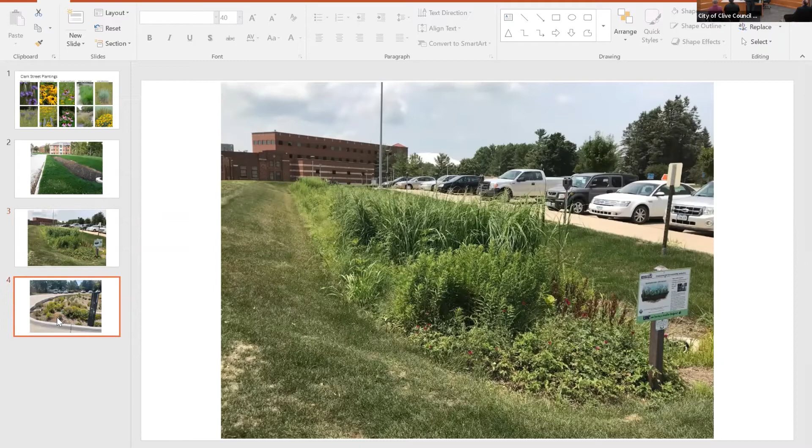Dry conditions do create some challenges for these cells, but these plants are designed to survive not only the very wet, but also the dry.

So I went out this afternoon and took this picture. Councilwoman Judkins has mentioned this cell before—it's designed a little bit differently. You don't have the turf that comes all the way down to it. This is a parking lot edge where water flows directly into the cell, though you can see the turf over here.

I pulled this to show that a cell that hasn't had as much time to grow out will still let you see the mulch underneath it, even with the dense planting we're doing.

And you'll still at times be able to see some of the infrastructure in the cell—here you can see the bonnet and the standpipe. So if the water ever gets that high, it has a way to start going directly back down into the storm sewer, as opposed to infiltrating into the soil.

And then you can see the inlet structure on this cell in particular. We have a different type of inlet structure on our cells on Clark Street, but you can still see it not only at the street level, but also another part that goes down to the bottom of the cell.

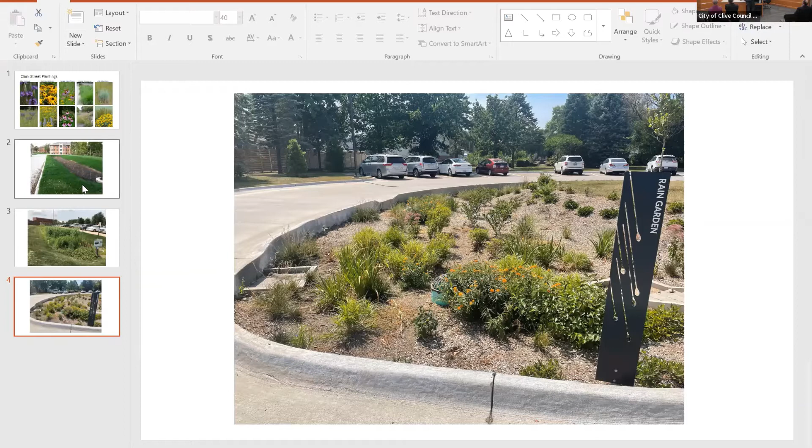Quick question: when you go back up to that first one and talk about some of the cells we have, it seems like many of our cells' slopes are different than these, right?

Yep, we do have some cells with a steeper slope, and none of them are just one long continuous stretch like this. There's one that might be close, but the big difference is they have walls in between them because of the elevation changes we have coming down—there's one on Clark Street that doesn't.

I just drove through it today. There was the one that's by Paul's house, a long skinny one like that as well.

So in the areas where we have slopes that are too steep, we're going to need to make some choices. This work needs to be done before any plantings go in, as our public works and park teams are going to be going out with the vac truck. They're going to suck out the existing mulch that's in it now and add more amended soil to the bottom of those cells, raising the bottom and creating that new level we'll be planting in. I think that's going to help with some of the elevation challenges, but not all of them.

We wanted to see what they look like fully constructed, but we fully understand as we've gone through this process, navigating from what was designed to what was built to now what we actually have to manage, that we're going to continue needing to tailor and work on those. There could be additional infrastructure we need to put in place, whether it's a small wall in certain places, so that we create something that can actually be managed long-term.

Well, I'm happy you said all that, right? Because at some of those points when you drive it, I think, wow, there's no way I could mow that today, let alone on a good day, health-wise, right?

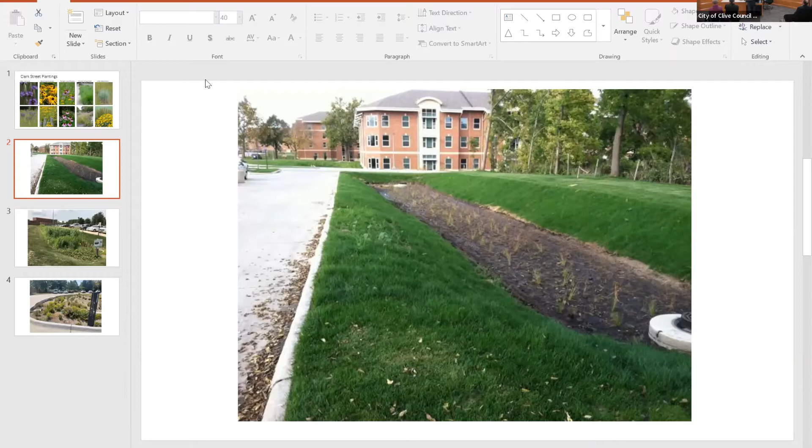Susan: as much of a leader as Clive has been in flood mitigation efforts, we haven't led on this, and there are many examples to direct people to look at throughout the metro. One thing I'm really happy about is that the city has looked to the experience of a community like Coralville, which led in this effort and has multiple bioretention cells. What they learned is to use plants that people recognize—the plants he was showing us are in lots of gardens. That's helpful, so people know that's not a weed, that's something very desirable. I really think the city has done a great job with that.

And the advice is to just ask people to give it a little bit of time for the plants to grow. Within a few years, we'll be as thrilled with this as other communities are with their efforts. So, really good questions. Thanks, Susan. Any other comments, questions?

Again, we have had a motion and a second to close the public hearing. Any further discussion? If not, would the council please vote on closing the public hearing? And would the clerk please post that vote?

The public hearing is closed by a vote of 5-0.

I'll move a resolution approving plans and specs. Second. Motion is seconded to approve plans and specs. Further discussion? Seeing none, would the council please vote? And will the clerk please post that vote? That passes by a vote of 5-0.

Move to receive the bids. Second. Motion to receive the bids. Further discussion? Seeing none, would the council please vote? And would the clerk please post that vote? Bids are received by a vote of 5-0.

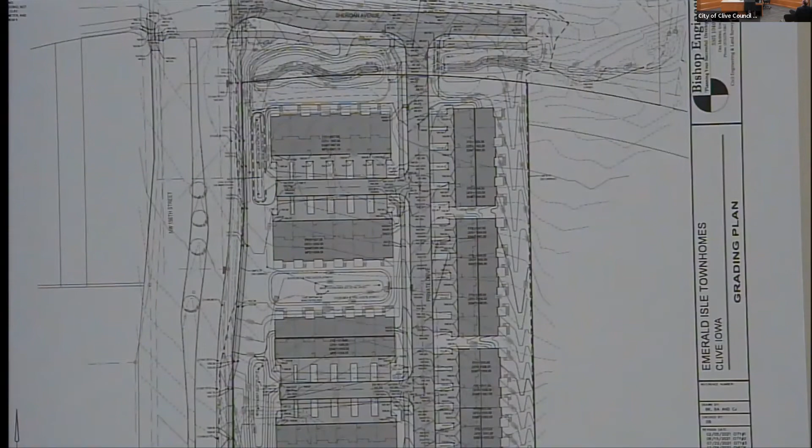What you're seeing before you tonight is consistent with the master concept development plan presented through the rezoning process. We've just finished working through the site grading and stormwater challenges we were still dealing with at that time. The property is just over 4 acres and will be developed with 41 townhome units. You can also see the extension of Sheridan to the north, which acts more as a shared commercial driveway frontage road than a true public street, as it will transition in this area to continue with the gravel drive that serves the existing cell tower and the Des Moines Waterworks facility.

It is possible with future development to the east that road could be extended and improved, but that wouldn't necessarily be a requirement for future development, depending on the access and routing for those specific properties.

The Emerald Isle Drive improvements, consistent with the zoning change and development agreement we worked through, will be completed by the city at a future time. That was the financial assistance council had agreed to in order to get this project to be a reality, along with some of the other site restrictions and considerations.

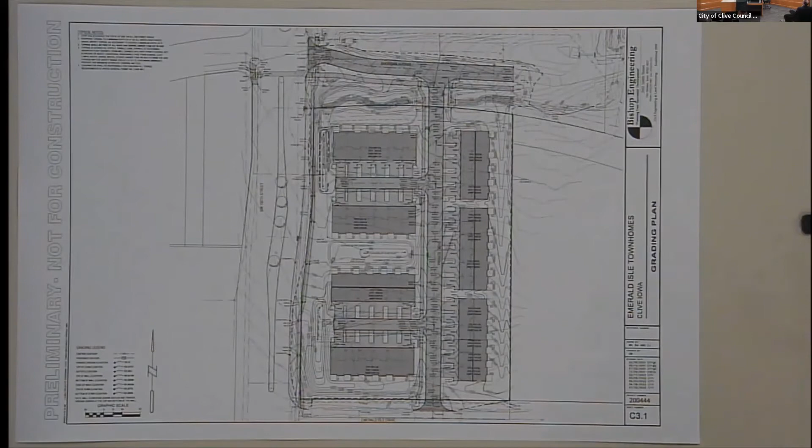Stormwater, as we talked about quite a bit through the rezoning process, is going to be handled in a few different ways. We have some bioretention located on the site, and they'll be handling their detention as well. We also talked about this north drainage way, which will provide a small portion of the detention requirement and the water quality volume requirement. And then off-site...

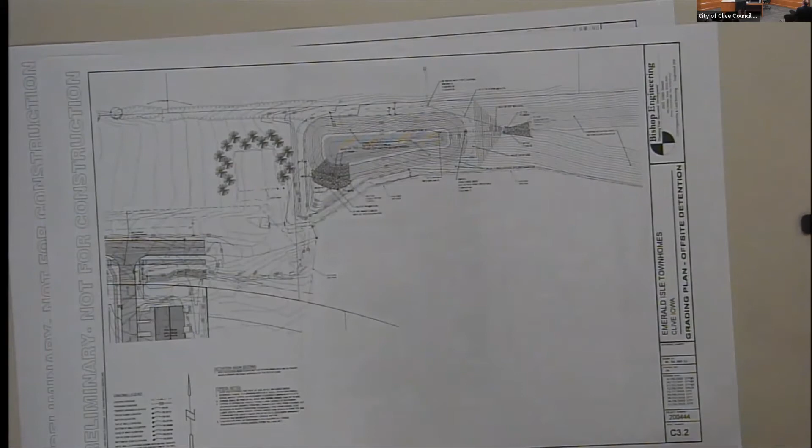Here's the corner of the site. Just up here behind the cell tower is an existing regional dry basin. That is going to be improved, off to the west of the existing basin, with a new wet detention basin that will provide the stormwater management needs for detention for this property, as well as picking up some additional capacity that could serve other future development in the area.

The development will be doing that improvement along with the project at the same time. Yes, that is going to be completed by the developer.

Don't know if we can kind of zoom in. Oh no, I have the big sheet, sorry.

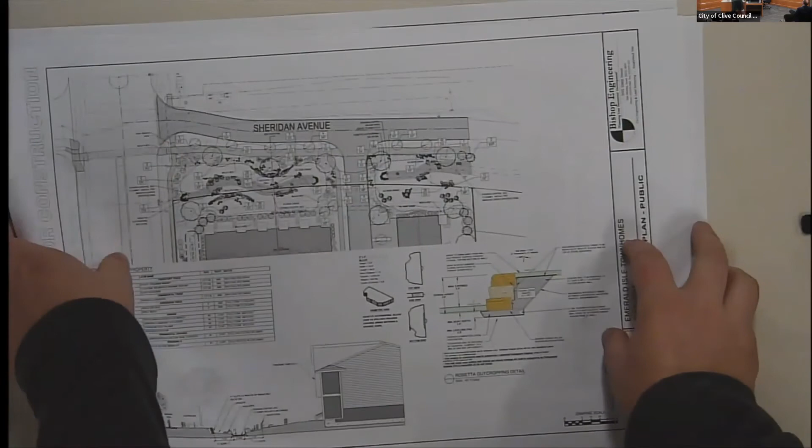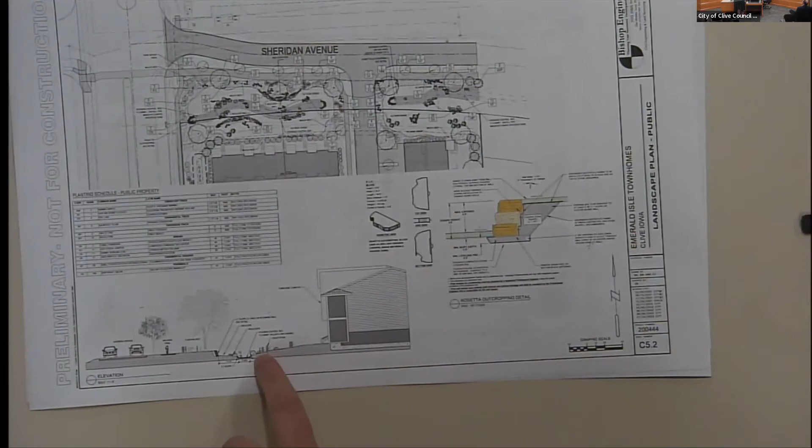For this north drainage way area, I know there was a lot of conversation about that in consideration with the design. You can see they are keeping that natural meander for the creek flow area. Here is a side profile showing more of what to expect with the townhome unit put in here. There are some grasses and ornamental plantings, as well as a block wall that is going to be this Rosetta outcropping style.

Weaver stone. I like that. Good.

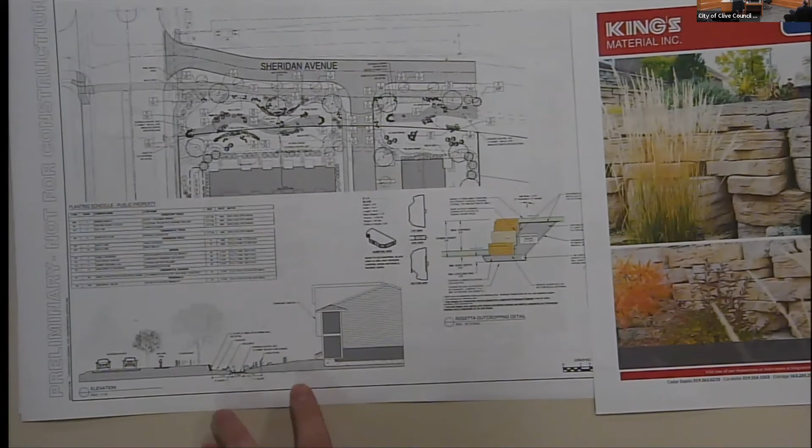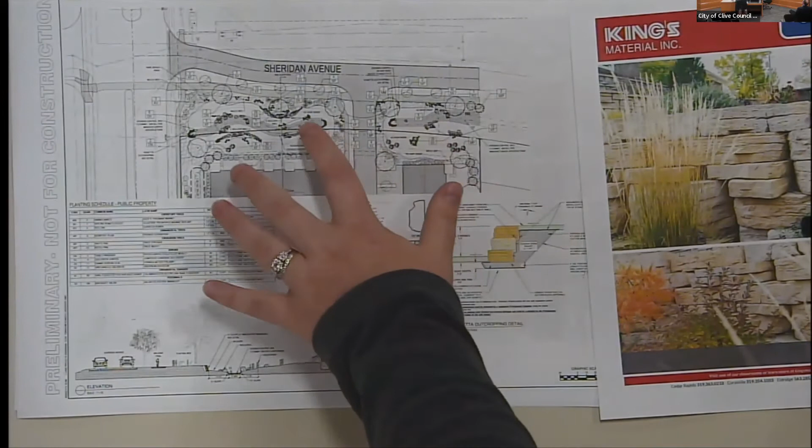There is space to allow for some tree plantings along that 8-foot sidewalk recreation trail extension. With fitting the road in with the existing water infrastructure and maintaining that creek channel, we weren't able to get the kind of curvilinear trail we typically see, but we think this is a good solution and will be an aesthetic enhancement.

There are also some spots called out here for park benches. And then there's the opportunity in the future for the city to continue extension of the trail being put in here, ultimately northeast to the Stonegate Park just a little northeast of here. That would be the long-term plan with future development or city projects in the area to get that connection to the park.

Has there been any discussion about like a playground, especially with Richard presenting on some of those more natural looking playgrounds? Has there been any discussion with the developer about that, or any plans?

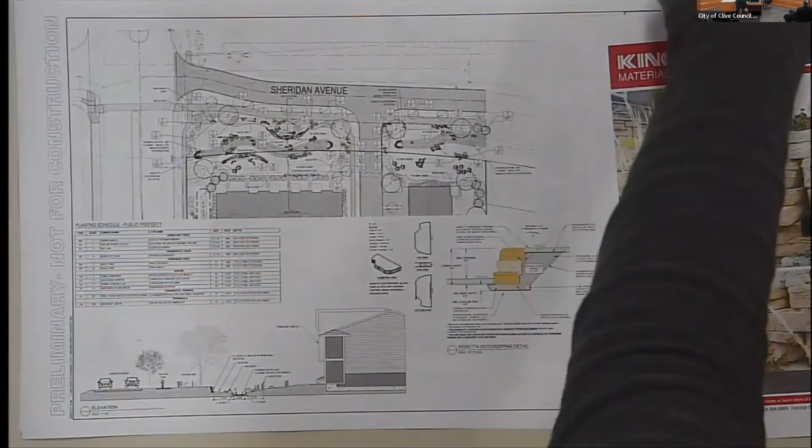Stonegate Park, as I was saying, is actually just right over here, so it's fairly close to this development. That is a traditional park with a playground that'll be fairly accessible once that full trail connection is made. To get there today, you would have to walk up to the corner and then across the street. It's a bit of a walk, but something people could do, and the pedestrian infrastructure will be in place to allow someone to take the sidewalk north and then east to get to the park.

Do we have a timeline on that future trail connection? We don't have a specific timeline for that. That is city property, and that is the routing of the future trail, so we could certainly prioritize it through your strategic planning and budgeting processes if you wanted to see it come online quickly. In the interim, we do have the existing sidewalk, and of course the sidewalk on this site will be installed with this project, so they would be able to get over to the park that way.

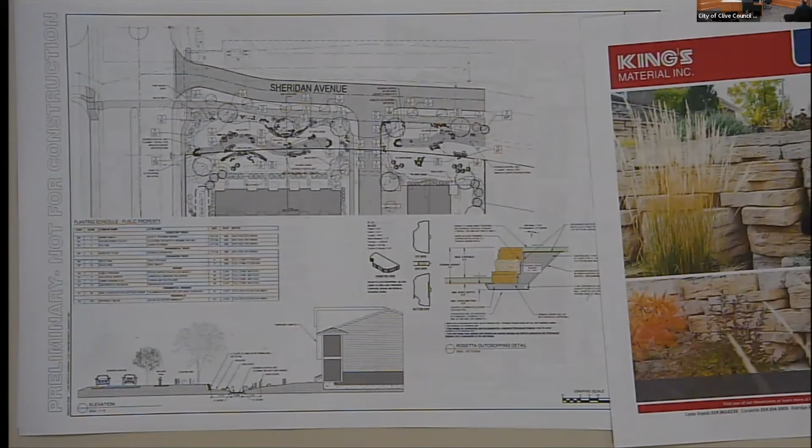Further questions or comments? Otherwise we just need to approve the site. Move approval. A motion and a second to approve the site plan and preliminary plat. Further discussion? Seeing none, would the council please vote? And would the clerk please post that vote?

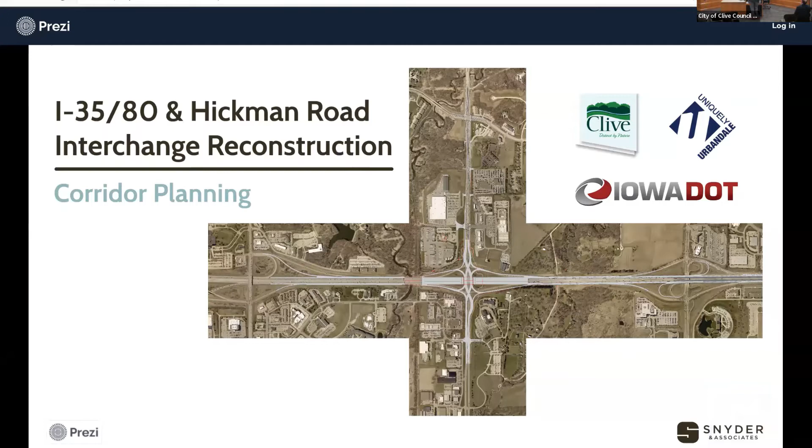We'll get the presentation set up here for Nate from Snyder and Associates to give the council an update. This is part of their charge in the scope of services on this corridor management planning effort taking place over the last year between the cities of Clive, Urbandale, and the Iowa DOT to plan for this massive transportation project that'll be coming at us in the next 3 to 4 years, completely reconstructing the Hickman interchange at the interstate.

And then what are some opportunities the cities want to look at in terms of pedestrian enhancements, aesthetic enhancements, connectivity, stormwater management, which as we've talked about earlier tonight is very important to our community, and ways that we can really make this stand apart.

And then on the end of that, starting to look at what are some funding opportunities, both at the federal and state level, and between the two cities, to make that happen. This is going to be our 50-year shot to do this right.

The council had prioritized in previous strategic planning efforts to get ahead of this, making sure staff's engaged early on, and this is the fruits of that effort. I will say this presentation isn't the end point by any means - there are still next steps to talk about between the two cities regarding chasing grant dollars and what that looks like.

The design will be incorporated with what the DOT is doing. They have a public information meeting they just set the date for, the Tuesday before Thanksgiving, where they'll be unveiling this whole project to the communities and the public at large.

Nate will get a little into that tonight, but this is really one checkpoint of many to come for a substantial project that basically takes through 2028.

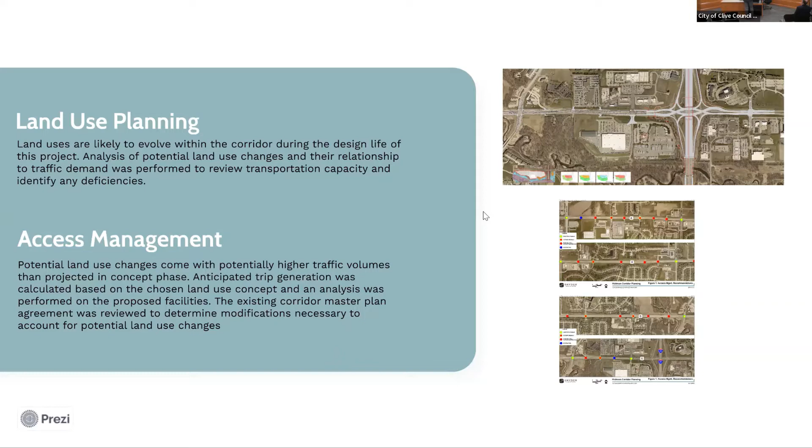I want to talk first about land use planning. Throughout the design life of this project, there is a likelihood that there could be some land use changes, and identification of those early on will help inform the design. We wanted to take a look at the corridor in general.

Early on in our discussions, it was clear that the majority of the corridor is not likely to have a wholesale change in land use, with the northeast quadrant taken up largely by Living History Farms and new commercial development in that corner. The northwest and southeast quadrants are pretty much fully built out as commercial. However, the southwest quadrant...

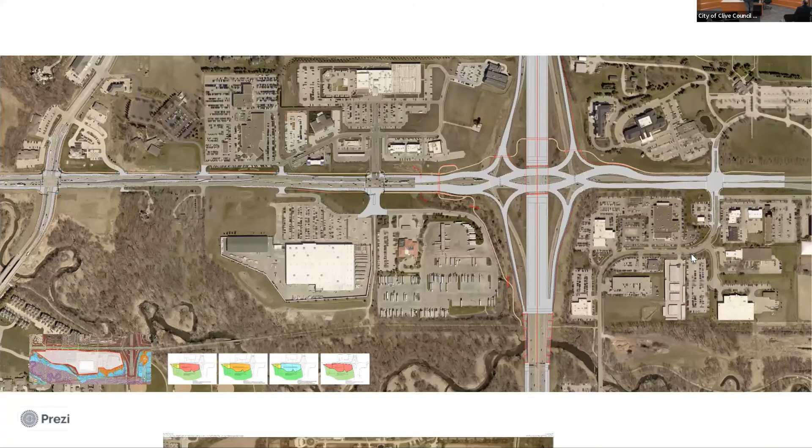South of Hickman from 128th to the interstate was identified as an area of focus for its potential for redevelopment. Taking into account the floodplain and floodway of Walnut Creek, as well as required setbacks, that area represents 56 acres of developable area.

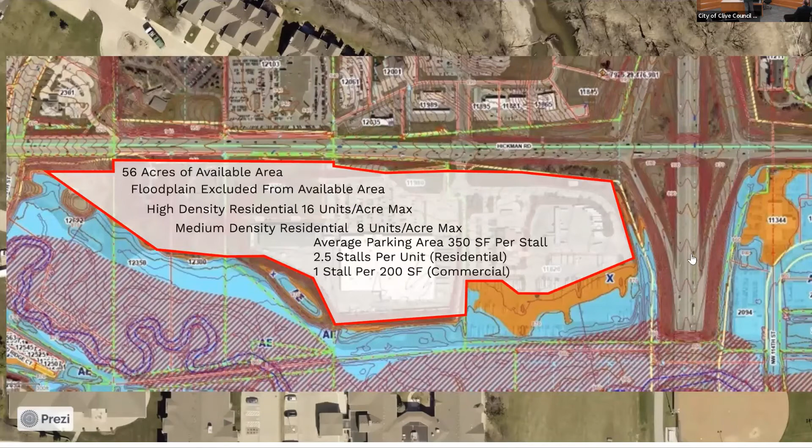The team put together a number of scenarios for redevelopment, including residential and commercial, or a mix of the two.

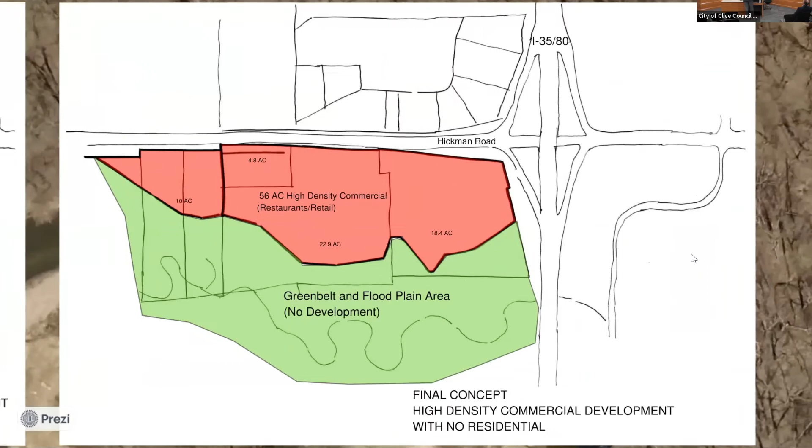Ultimately landing on the entire area being redeveloped as high density commercial. This represents the highest and best use of the land, as well as the worst case scenario for future traffic generation. What we do at the interchange now, we don't want to hinder future development in the area.

To give you an idea of that traffic, the current site, including the Loves and Menards area, generates about 6,000 cars per day. If it were to fully redevelop into high density commercial, we're projecting that to be over 27,000 vehicles per day.

Can I ask a quick question? Have Loves and/or Menards given us an indication that they're looking to move, and that's why we're thinking we can redevelop this, or have I just not heard that before? No, they haven't given us an indication at this point.

We wanted to make sure that if there's a kind of a 50-year decision being made on road infrastructure, the access management and traffic management can withstand the potential for future development. You already have significant retail with Menards. If anything were to change with Loves or the vacant properties to the west, we wanted to make sure that from an access management and traffic generation standpoint, we're not creating a new issue if 20 years down the road there's a significant redevelopment opportunity. So we're really looking at a 40 to 50 year window here, and we wanted to make sure we're accounting for that.

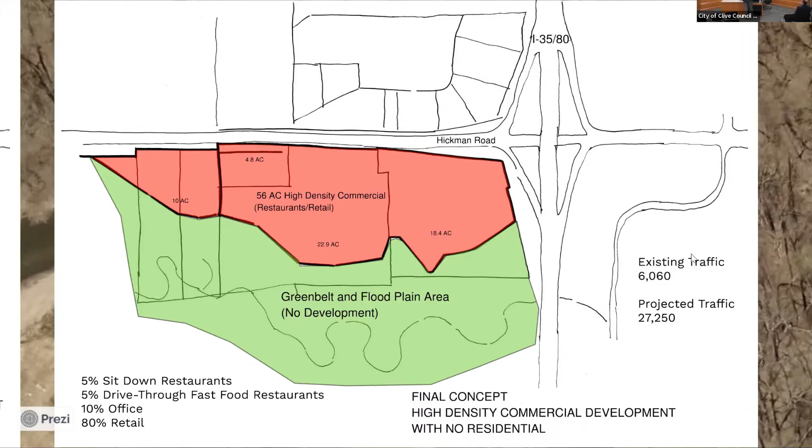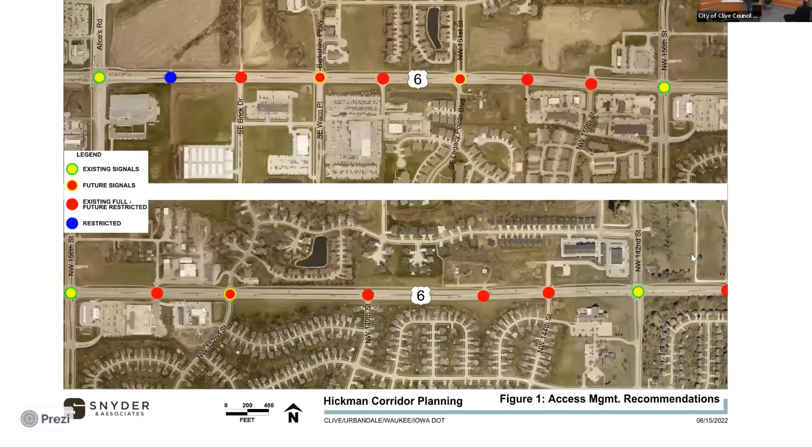DOT, City of Clive and Urbandale do have an access management agreement in place that goes from the interstate west to Alice's Road. We used the potential redevelopment and those traffic projections to look at that agreement and make some recommendations.

Focusing on our area here that we just talked about, the current restricted access at, I guess that's the Walnut Creek United Methodist Church here. In the future, if this area were to redevelop, that would need to be converted to a full signalized intersection and able to handle the traffic.

So these exhibits have been developed for the cities and the DOT to update and renegotiate that access management plan, and that would be a next step coming out of this. Don't need to get into the details, but from Clive's perspective, we want that opportunity for a future signal fully memorialized in the agreement, because we're going to be the ones that need it for development, not necessarily the Urbandale side.

And we've communicated that to them. They've of course communicated to us, as I've indicated to council, a future desire of a traffic signal at Country Club Boulevard and Hickman Road. So hence the word negotiation as part of some of these considerations.

But this next step isn't necessarily on Snyder's plate. This is between the cities and the DOT, to look at these changes, understand what the performance expectations are, and at what point it triggers these things to happen that we need to update that agreement.

That'll be a next step that, again, you'll hear a lot from me tonight on this particular item, but we want to make sure we're outlining some of these next steps as you all head into strategic planning next week, because there will be action items for you all to consider coming out of what you'll see here tonight.

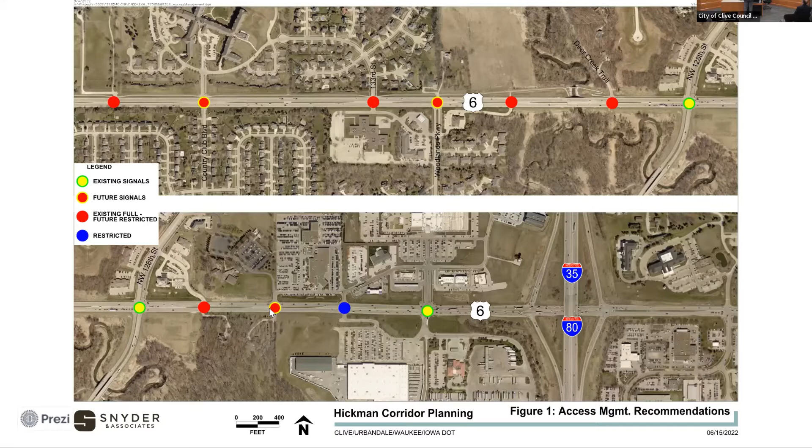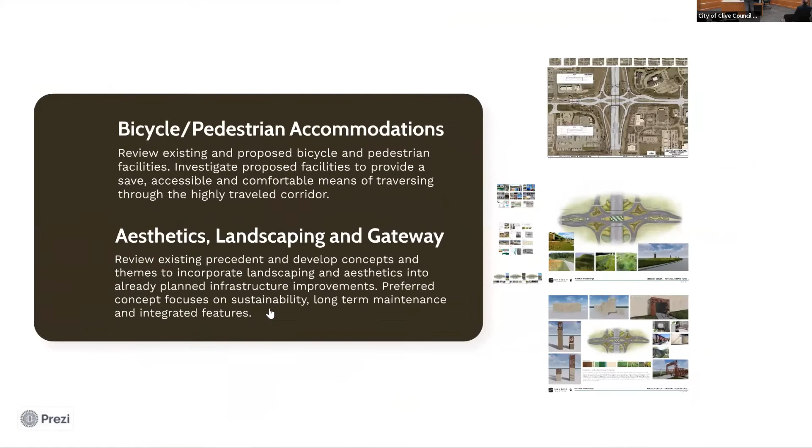If nothing else on the land use or access management, I'd like to move on to the second topic tonight, which is the bicycle and pedestrian facilities, as well as aesthetics, landscaping, and gateway features, since they kind of go hand in hand. Currently in the corridor there are no pedestrian accommodations on Hickman Road in our project area, so reconstruction of the interstate at the interchange presents an opportunity to build those facilities.

A typical pedestrian accommodation would include an at-grade facility, and that's what's shown here. We use this as our base option, including at-grade facilities. Typically in a DDI, as you traverse the interchange, you'll cross over to the center, where there's a protected area in the middle, and then cross traffic again to get back out to the exterior.

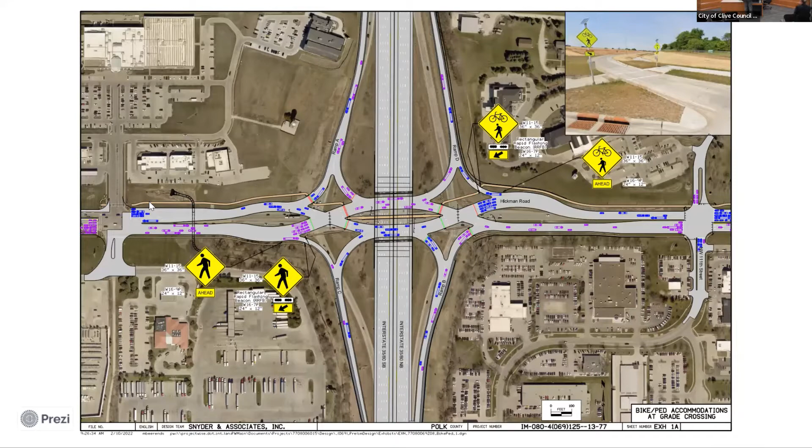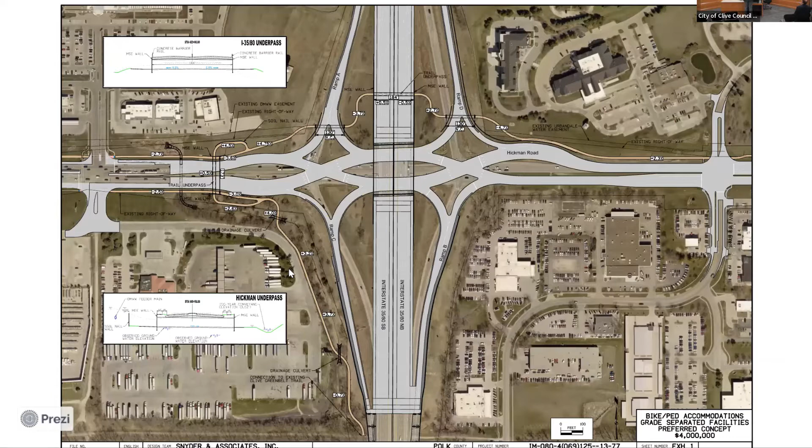I'd ask Tim to come up and present some of the aesthetics, landscaping, and gateway features associated with the pedestrian improvements as well as the interchange.

Good evening, I'm Tim West, a landscape architect at Snyder and Associates. We've been working on an aesthetic package for making the interchange area a little bit more accommodating visually, and I'd like to walk through some of those improvement concepts with you today.

Hickman represents a pretty large transportation gateway into two communities, Clive and Urbandale, and that sometimes poses problems for designing a theme that relates to both communities as we establish the look and feel of this entrance into either community.

This is the final version of the master plan, or concept plan. I'd like to step through a few of the initial processes in our design and also focus in on a couple of the main improvements for the aesthetic concept.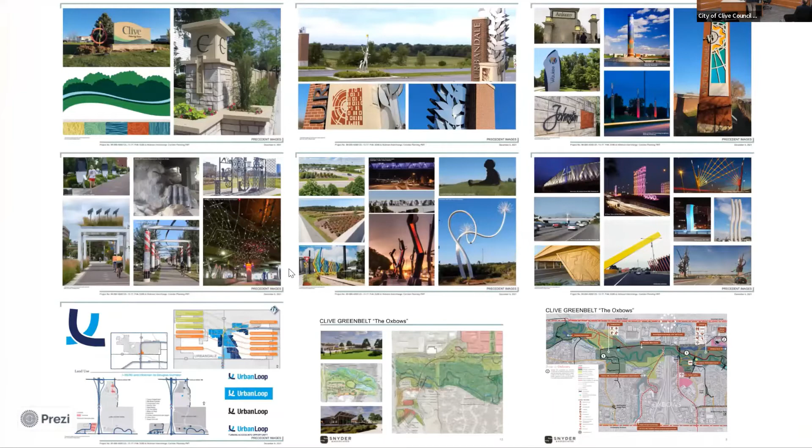These boards represent some of the early work we did establishing information we could use to pull together different themes relating to both communities. The top row shows some of the materials, colors, and textures that Clive or Urbandale may incorporate in their already existing gateway features, as well as looking at what other communities are doing, presenting these options to the design committee for further review.

The middle row, we started to look at inspirational and precedent photos showing what other communities are doing for whimsical or public art type enhancements that could go with this interchange, as well as reviewing your existing planning documents to make sure we were accounting for anything currently underway, whether promotional, growth, or recreational enhancements through this area, or something that might be interesting for us to play a theme off of.

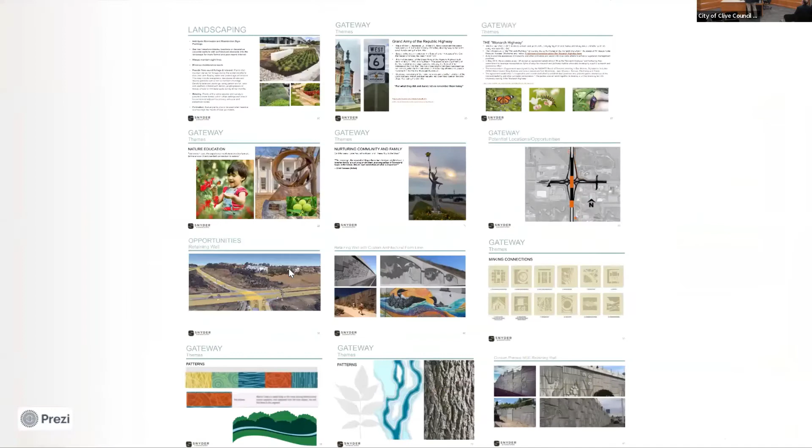We also took a look at some mini themes, if you will. What would it look like if we captured a historically important aspect of the corridor, such as the Grand Army of the Republic Highway there on Highway 6, that middle one on the top? We looked at whether there would be some interesting aspects to any type of natural processes or promotion of the Monarch Highway, things like that. We also took a look at landforms on the bottom couple of rows. What is this new interchange going to offer for opportunities where we can show off some enhancements or some aesthetics?

We're going to have some new retaining walls and some grade separation areas that we can use for promoting some of those colors, textures, and materials. What are the landform patterns that we'd like to incorporate?

A recurring theme started to come out of the Walnut Creek corridor, which passes just south of here and parallel to Hickman Road. You can see there's some initial themes that are more creek or flowing from a natural development standpoint.

We developed three concepts and started to take a look at different aspects with these. The one on the left is more of a natural pathway theme, where we really focused on the at-grade pedestrian route that went through the center of the interchange, and started to focus on the way the pedestrian would interact through that area. So you can see there's some trails and things associated with going through this center median. Those don't take advantage in this concept of any types of flyovers or larger bridges or higher bridges that would go over different parts of the interchange.

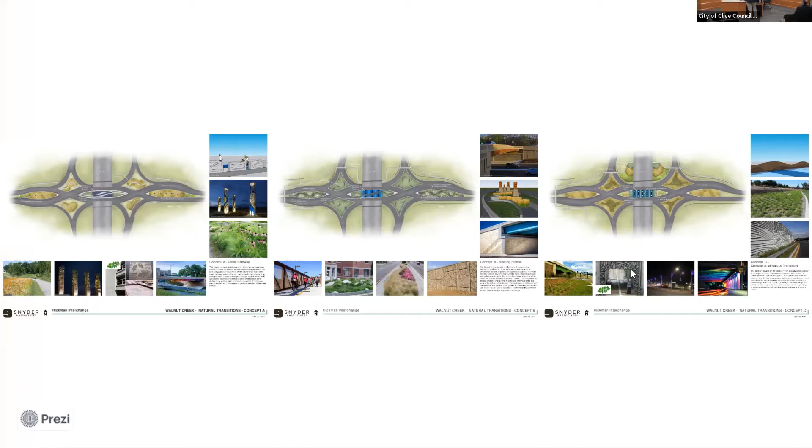We also started to incorporate some different types of entrances into these different overpass or underpass situations where pedestrians would have an opportunity to maybe focus on some texture and color changes where we normally don't do that for the motorist as they come through. We focus more on larger types of enhancements because they're not able to pay attention or get close enough to those to really make that detail worthwhile.

So we kind of settled in on the main master plan here for our preliminary design. You can see that it was really a momentum into the natural transitions, looking at native plantings, native landforms. What does it feel like to go down into the Walnut Creek corridor?

So we had some waving type of action in the colored concrete that goes underneath the overpass, but really celebrating kind of the lightness into this darker underpass and then back into the light. A lot of the focus was on more native plantings and larger landforms such as berming, and then some more monolithic, taller types of decorative columns.

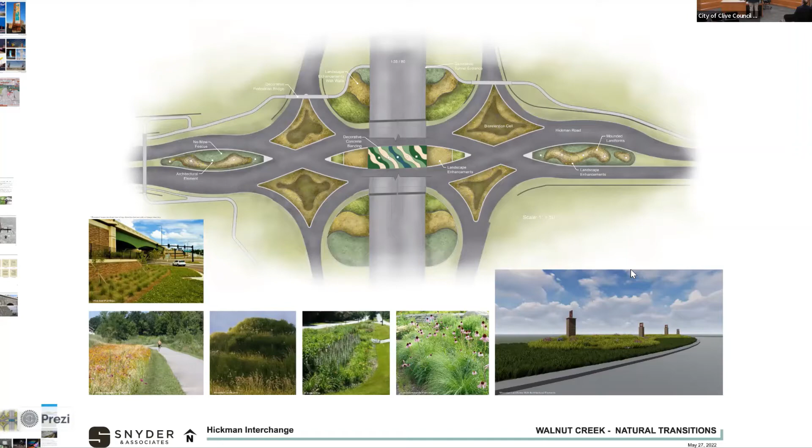A little bit of detail on those. The upper photo on the left might be some larger rippling current type of designs that would be on the panels underneath the overpass, kind of leading you through as a motorist underneath that area, contrasted with the walnut leaf pattern that would be incorporated near more of the pedestrian or bicycle areas. It could also be incorporated in some of the retaining walls that would be adjacent.

The columns on the left-hand side, the top image shows that symbol of the multi-leaf walnut, the walnut tree leaflet, kind of hearkening back or throwing out a nod to that Walnut Creek corridor without getting too literal on the creek. An alternate could be incorporating more of a texture or an internal lit framework that might provide some shadow and light interest in that column as well.

On the right-hand side is more exploration of what the overpasses or underpasses look like and what type of mini gateway or entrance features could we incorporate in there. Still keeping with the themes of natural colors, natural limestone, the Corten steel or the darker red color that is prolific throughout the gateways that you already have through both communities, and replicating some of those man-made features into those colors.

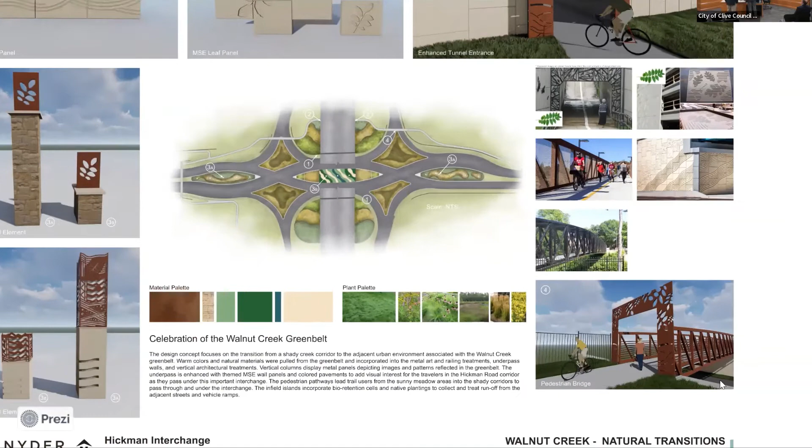I'll zoom in on this image here, kind of shows it best. From the surface of the roadway underneath to the bottom of the beam, that'll be 17 feet of clearance. We are proposing a style of truss bridge that minimizes that superstructure, but you're still going to be around about 20 feet of elevation from the surface of the trail to the surface of the roadway.

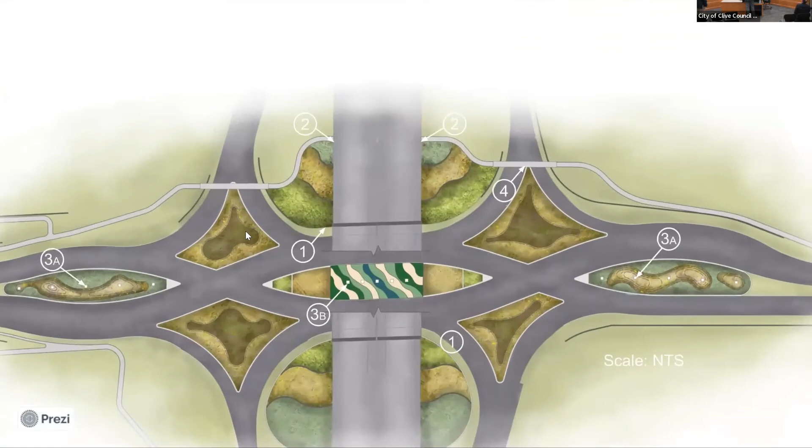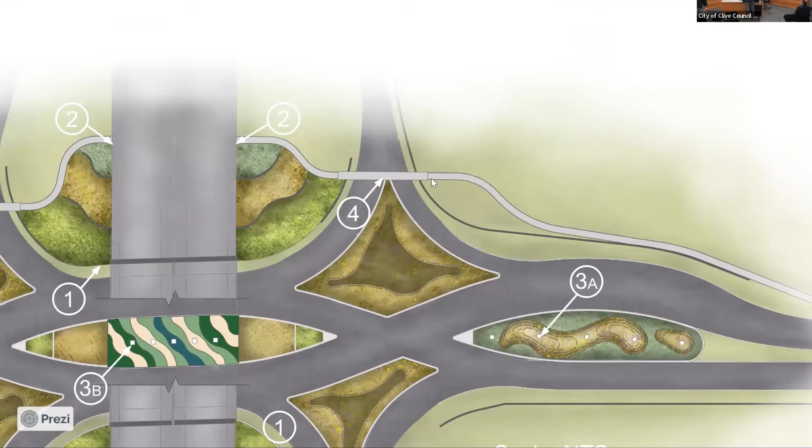That grade will be made up with retaining walls on each side, shown here in gray. These 3 retaining walls that I just highlighted are necessary for the grade separation for the bridges. This wall here that traverses quite a ways up the ramp is actually needed for the roadway itself, so we're taking advantage of that necessary wall for the roadway construction to also make up that grade for the bridge itself.

Trail, if I remember, Nate, doesn't exceed 5%. No, we're about 4.7% at our highest. So it's fully ADA compliant through the corridor, both east-west on Hickman and north-south down to the Greenbelt.

This sheet also contains some color palette, material palettes in the middle. Although we haven't picked out plant material specific to this, those will be in the next steps. This is more of a preliminary design master plan that we're utilizing to show what types of treatments can be possible, and we've associated some pricing to this as well, as you'll see a little bit later in the presentation.

There's no questions on the aesthetics. I'd like to introduce Dave to talk a little bit about the stormwater enhancements.

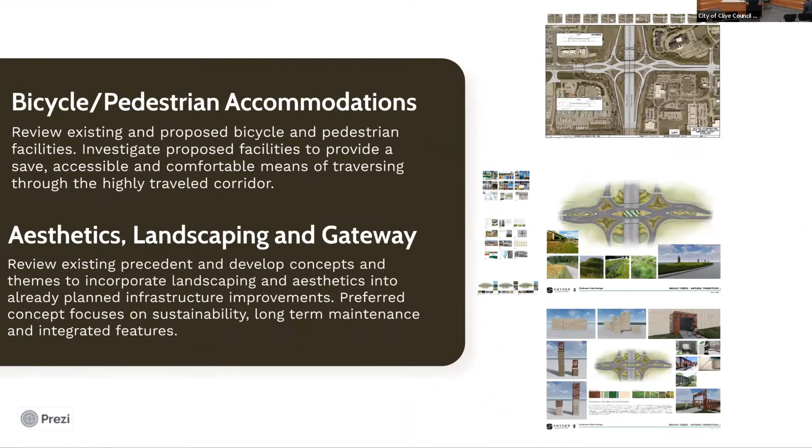Yeah, keep going forward, Dave. There we go, there we go. One more.

I'm Dave Mulholland with Snyder Associates, and I'm going to talk about stormwater treatment for the interchange project. First of all, the intent of the stormwater treatment is to reduce pollutants and improve stormwater quality through infiltration and reduce downstream erosion. For this project, we followed the Clive post-construction stormwater management ordinances.

There are 2 components that we're looking at or addressing. One is the quality, through infiltration practices, mainly infiltrating certain volumes of stormwater. The other one is quantity, reducing through detention practices the amount of water that goes downstream from the interchange project. The criteria used for this project were the unified sizing criteria out of the ordinance.

In terms of the quality aspect, there are 3 components we looked at. One is the recharge volume, infiltrating the first half inch of rainfall, which applied to the new pavement surfaces. There's a water quality volume, infiltrating or capturing the first 1.25 inches, which also applies to new pavement surfaces. And there's also the reconstruction volume, capturing the first 1 inch, but that applies to the existing pavement surfaces.

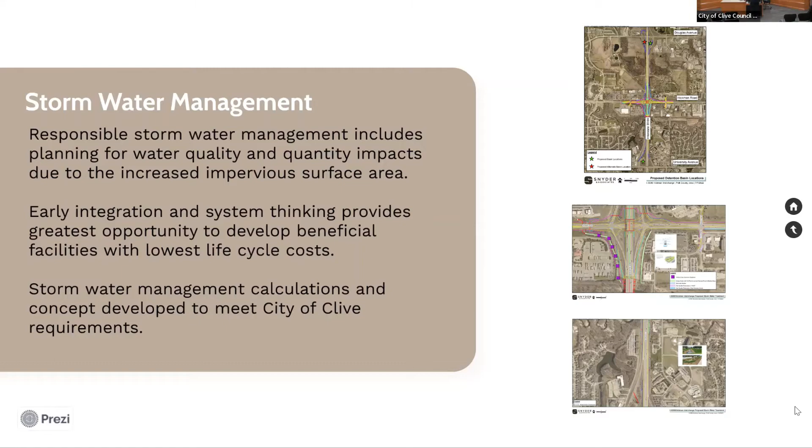What we looked at in terms of the project was just the areas within the city of Clive itself. For this project, that's from the center line of Hickman south to University.

This slide addresses some of the proposed detention basin locations. Hickman Road is shown in the center, left to right, and Interstate 35/80 is shown up and down in the middle. The green stars are the proposed basin locations. One basin is within the University Avenue interchange in the northwest infield area. The other basin is up at the top of the slide, at the southeast infield area of the Douglas Avenue interchange.

There's also shown here a red star marking a proposed alternate basin location in the southwest infield area of Douglas. That alternate location is shown because the University interchange is eventually going to be reconstructed, I think as a diverging diamond interchange as well. That's going to happen several years down the road, but when they do that, it might be problematic to recreate the detention basin there with the volumes they might have available. So this alternate location up at the Douglas interchange was chosen to avoid some problems down the road with that University Avenue interchange reconstruction.

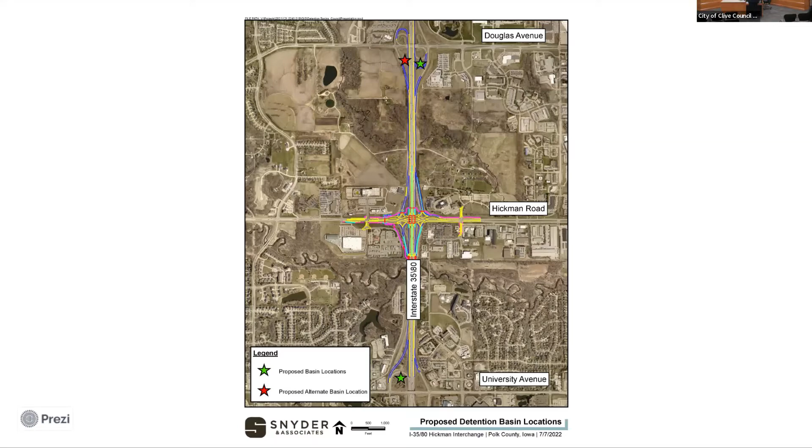This next slide shows some of the quality treatments I spoke of earlier. Hickman Road is shown at the top, and the interstate and the bridges over Walnut Creek are at the bottom. First, we propose in each of these diamond-shaped medians on the west and east sides of the interstate, within Hickman, these rectangles shown with a diagonal hatching.

Those are bioretention cells. As you've heard about other bioretention cells tonight, those will have to be incorporated into all the aesthetic treatments within each of these median areas. Right now, they're just shown as the area we need for treatment. So that's the first component.

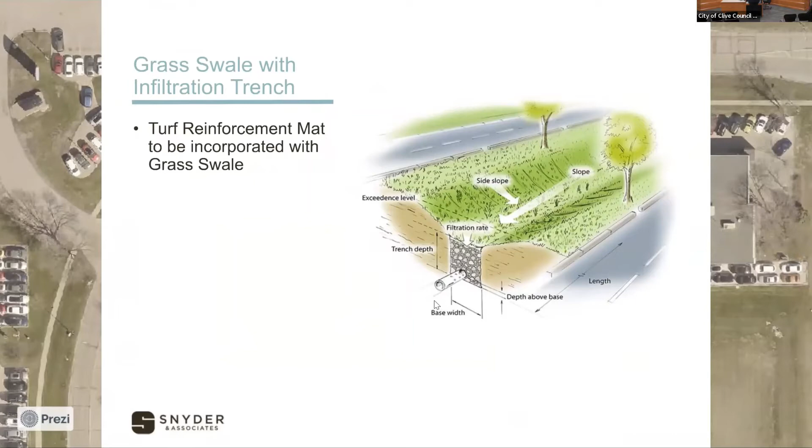The next component is these green rectangles by the Love's truck stop, adjacent to the southwest infield area of the Hickman interchange and the southeast infield area of the Hickman interchange. Those are grass swales with a rock or aggregate subbase that will infiltrate and allow treatment of stormwater. They drain from north to south, and whatever isn't infiltrated is all sloped down towards Walnut Creek. This graphic is just a simple illustration of what this would be—a grassed waterway with a rock infiltration trench, a possible subdrain—that's one component of the treatment shown here.

So if we could potentially lose that University Avenue basin, and we're discharging everything north to south, is that going to cause a problem in the future if we lose that basin?

Everything's discharging north to south, right? The basin is at the south end. Oh, well, it comes south to north from there. From University, everything drains toward the north. These swales and infiltration trenches I'm showing drain from Hickman southerly to Walnut Creek, whereas University, from the University Interchange, actually drains to the north towards Walnut Creek.

What's a gabion drop structure? That's what those purple squares represent - wire or metal enclosed boxes full of rock revetment. What they're doing out there is kind of grading; they do some erosion control and help flatten the grade out of that ditch.

I've been out there and looked at them - they're kind of beaten up a little bit. As part of this project, while we're doing all this work, I thought we might as well replace them now. So they're showing on here. They're not really part of the stormwater treatment, but they are going to be replaced as part of the overall project.

One thing to know about that ditch is there's actually two ditches there - one the DOT owns today for the interstate, and the Hickman one, which we call the Loves ditch. Because of the grading of the new ramps for the diverging diamond interchange, the DOT is going to be in a position to acquire that area and convert it all into one ditch. That's part of their right-of-way acquisition that they're going to be working on. They will actually take that over.

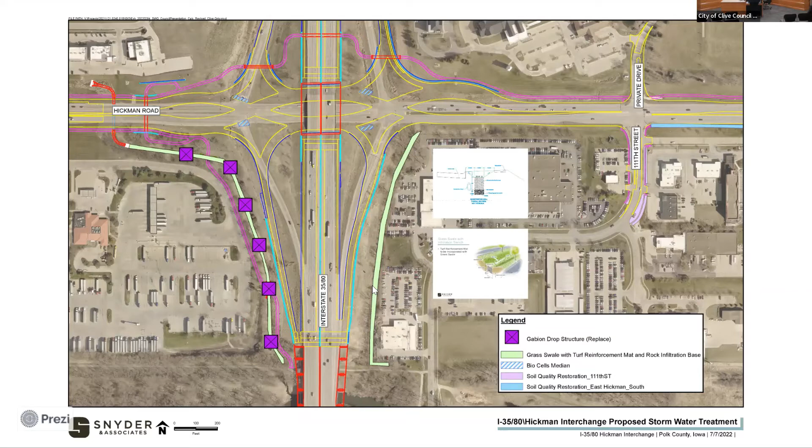The other treatment component shown here in the upper right-hand corner, 111th Street, labeled in the drawing with purple shading, is proposed soil quality restoration, in which the soil is mixed with compost to help its infiltration capacity. We propose to do that up there - that's more of an urban roadway section where there aren't ditches. It's more urban sidewalks, and that seems to be a better fit for treating that area than a grass swale.

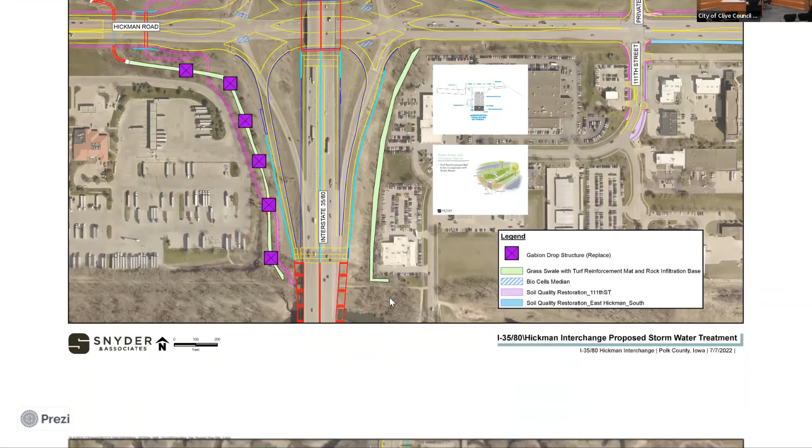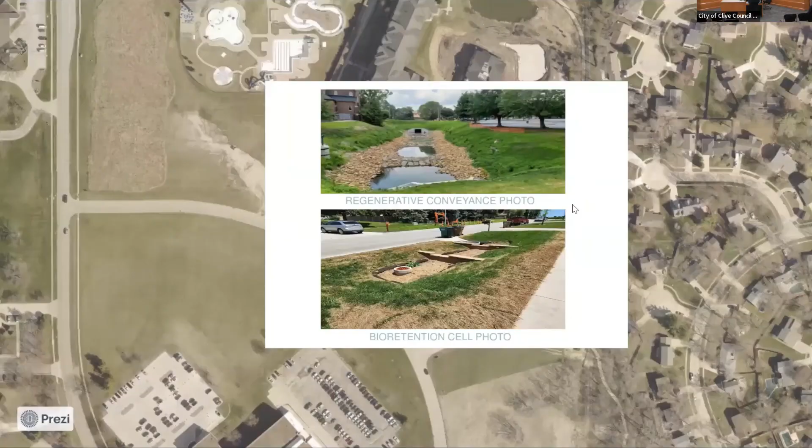I'm going to zoom in on this top photo. These are a series of pools designed to capture stormwater, with a sand base where the water slowly infiltrates down through them. That's another treatment option proposed within those ditches. It'll look somewhat similar to this photo, a series of about 3 pools, probably 2 to 3 feet in depth. That's what's proposed along the interstate there.

And finally, this bioretention cell photo - this is actually from your Clark Street project, I went out and took a photo of this. I maybe should have had another slide, but just wanted to show you what the bioretention cells may look like in the median areas of Hickman. They might not look exactly like this; there are many options we can use for those. I just wanted to include this as an illustrative example.

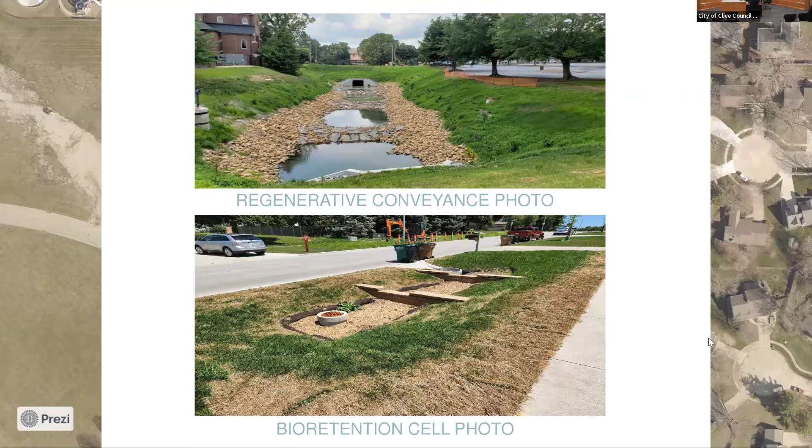They're very familiar with that bottom. Yeah, I got that - I didn't know that before this meeting, but now I do. So, with that, I'll turn it back over to Nate.

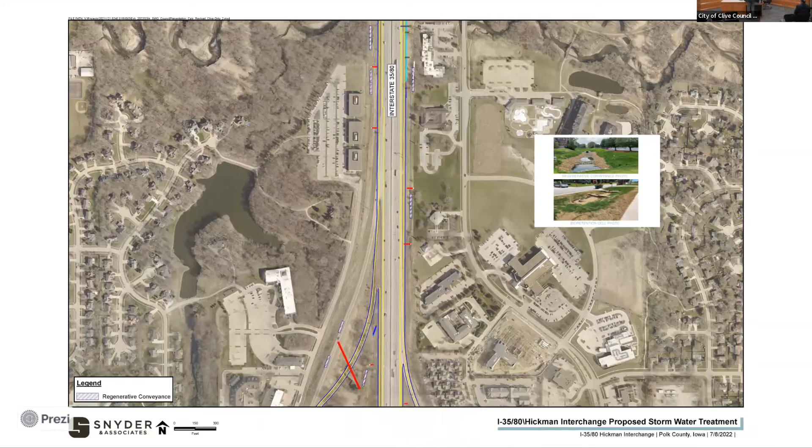So finally tonight, we'd like to discuss the project cost for these corridor planning efforts, as well as some of the funding strategy that we are planning to undertake with grants and other funding sources.

Let's first talk about project cost. The cost associated with the corridor planning efforts is just under $8 million. $4 million of that would be associated with the bicycle and pedestrian improvements, including the bridges, the underpass of the interstate, the underpass of Hickman Road, the trail itself, as well as the trail down to the connection to the Greenbelt. There's about $3.3 million estimated for the landscaping and aesthetics, including a lot of the features Tim went over. The stormwater management component is just a little bit under 700,000.

And to be clear, that's just the planning, not the actual construction. The interchange itself is $76 million.

To give it a kind of an order of magnitude here, the overall construction cost of the project itself, without the additional enhancements, is just shy of 77 million, projected right now. So we're looking at about a 10% increase to cover the cost for the corridor planning enhancements.

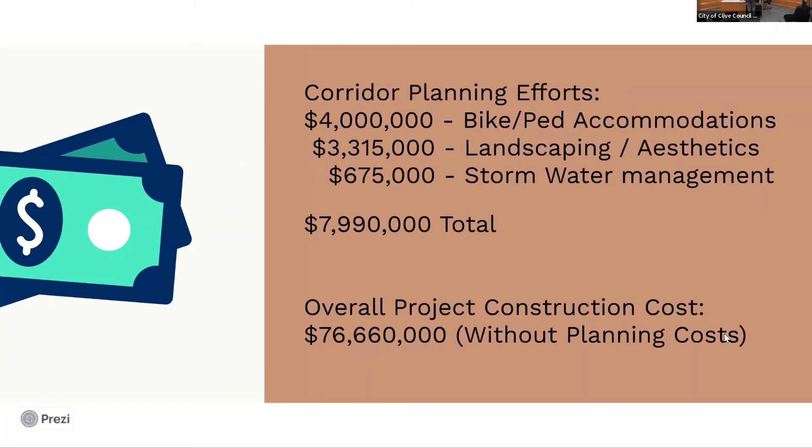In terms of the city's role and the actual hard infrastructure of the interchange, that $76 million is, we'll finalize this, but that's on the DOT. What's on the cities is the enhancements, that's the $7.9 million we're talking about, and that's a split between Clive and Urbandale, with grants and so on. So the city of Clive has taken a lead on some of these initial planning efforts.

There's been $2.5 million already secured for the infrastructure component through the STBG program, which is the Surface Transportation Block Grant Program. That comes out annually through the MPO, and there should be more of that hopefully down the road.

If you do your job. No, I'm working on it.

For that funding, Councilman, I believe the applications have been in the $3 to $4 million range, and the awards have been in the $1 million range. From that point, we've looked at additional funding sources available.

The Iowa Clean Air Attainment Program, ICAAP, is a viable option for this project. It qualifies — it's a program that looks to reduce emissions and, as the program states, attain clean air. There's about $4 million in that program statewide, which we would plan to apply for, I believe, next year, so that funds are available for when construction is going to happen.

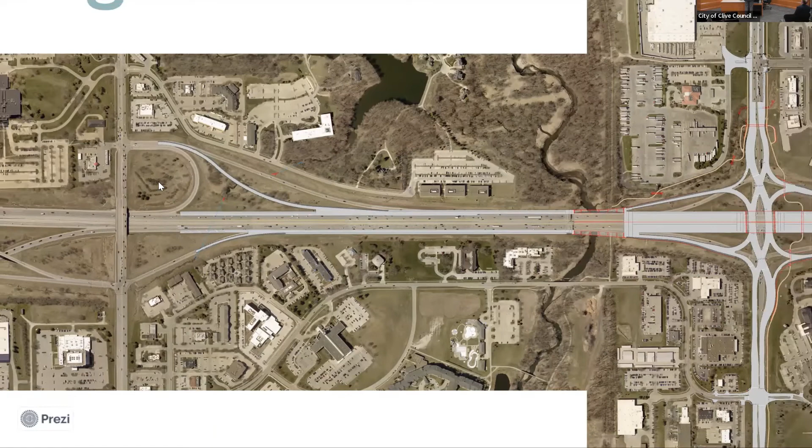That doesn't make sense, but.

Any other questions, or we let Nate go? Well, I really appreciate your time tonight. Thank you for letting us present this very important project. You'll probably be seeing me in the near future at future council meetings and at the public information meetings. So thank you very much. Thank you, Nate, appreciate it.

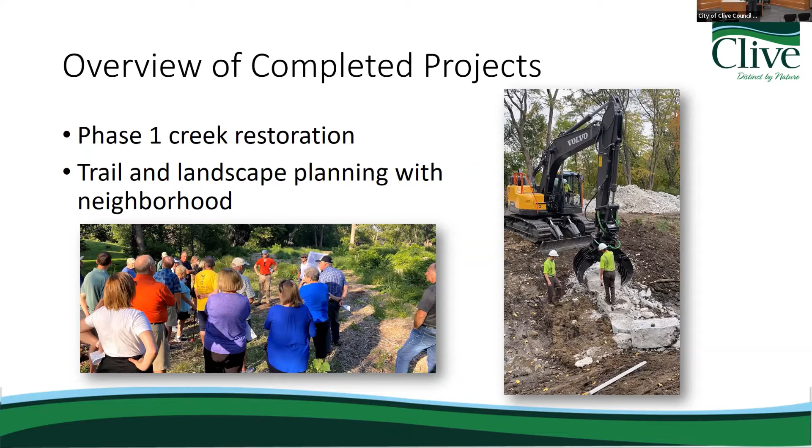Using that huge piece of equipment to very minutely move those boulders in a way that helps the creek be stable and succeed with the project goals.

Here's another photo of that phase 1 work. What you see at the top of the photo is 98th Street. We're looking to the west here, and you can see probably about two-thirds of that first phase of restoration once we got all the work done - seeded and the bank stabilized with some jute mesh to hold it down until the vegetation grows. You can see here a massive undertaking by the Public Works team, and it's a cool result so far.

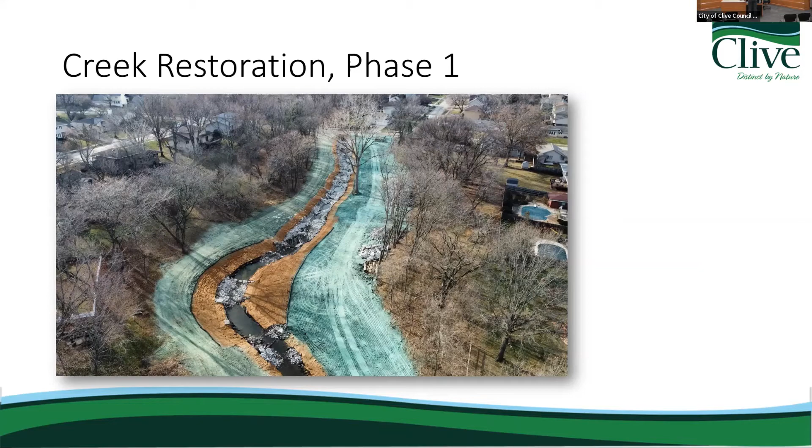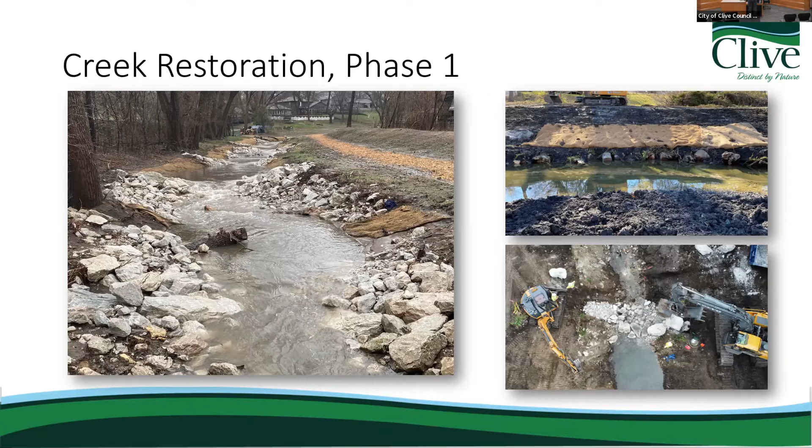This works here - just a quick video, taken earlier this spring, showing how some of this looks as water's flowing through. It's not a top-of-bank type event, but it started to give us a feel for how this worked and what it looks like in action.

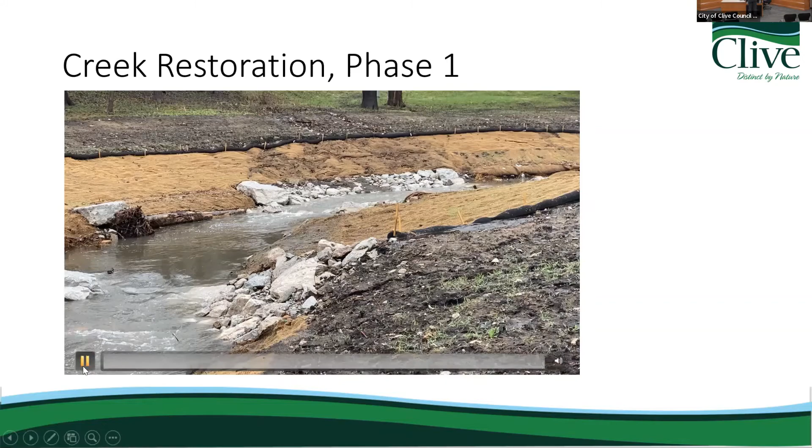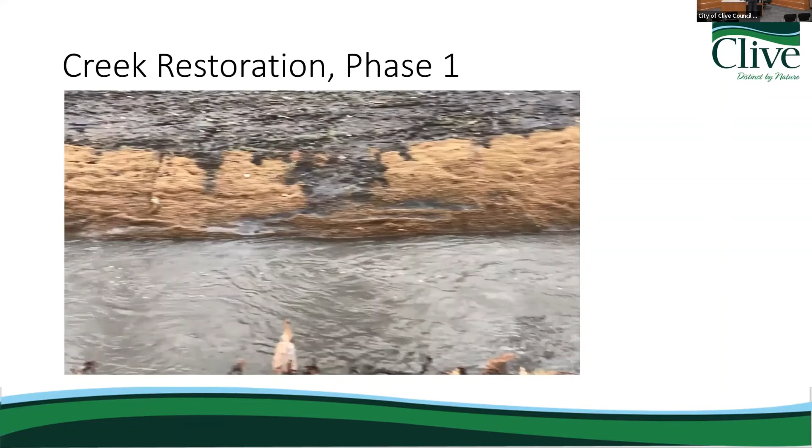You can start to see how the way they put all those rocks down helps define how the water moves through this space. It helps it be in a much more sustainable way. Apologize for being jumpy like that.

So just a few seconds there, but you can see taking all that work we put into that and allowing that creek to flow through there - depending on no matter what the level of the water is - and still be done in a stable way that protects the private property, some of the issues we had through this area here, as well as making it more ecologically sound.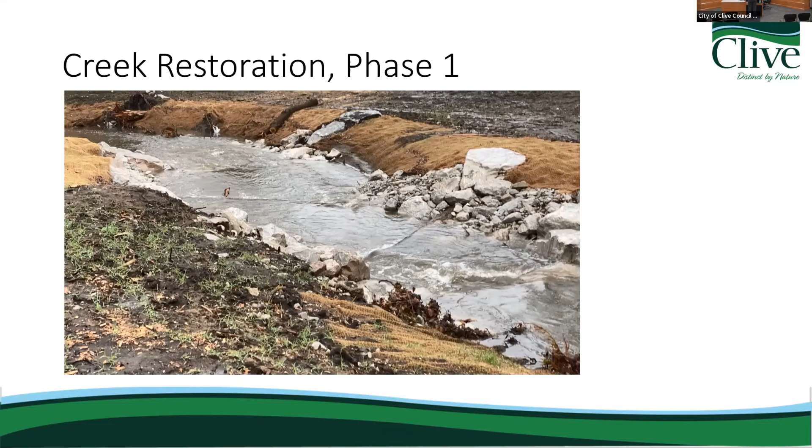Next, I'll walk through some of the upcoming projects. The big things we have coming up are the second phase of the creek restoration, which will take the restoration from the pedestrian bridge east-west all the way to Walnut Creek, up to Lincoln, and a couple hundred feet beyond that to where Indian Hills Creek dumps into the larger Walnut Creek.

We'll also undertake the first phase of landscape restoration. There are areas not needed for public works to access the site for phase 2 restoration, mainly on the south side of the creek and the east side in what's been done in phase 1. So we're able to start doing some restoration there, including buffer work, trees being replanted, and native vegetation being reestablished through that whole area.

Next is the trail design and construction. That's something we're looking at based on your guidance tonight and the budget process—starting design this winter, with the hope of bidding it out and getting it under construction next fall, wrapping up probably in spring of 2024. Finally, we'll work to restore the rest of the site starting spring 2024, including all the buffer restorations behind properties as well as other landscape restoration through the rest of the property.

As we looked at trail and landscape planning with residents, the council hired RES, the company that did the Greenbelt Master Plan. We felt the synergy working with them on that plan tied in nicely here, just down the street from that area.

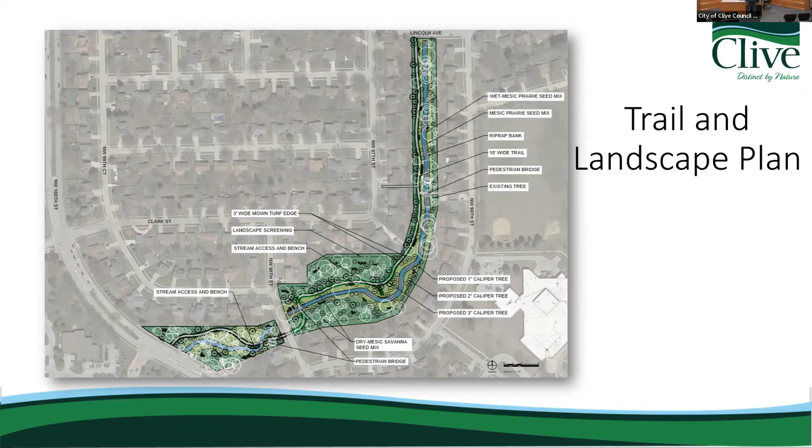Related to that, I remember an issue that came up in the meeting was wildlife habitat, that people were really concerned about having been lost. So in addition to what people are asking for behind their homes, what's the concept that helps make sure that's being restored?

This next map shows a little bit more. The way we've looked at it is the buffer areas, which is the area right behind the property owners, and then there's the rest of the space.

In the buffer areas we went through several iterations of what the buffers could look like when first planted, after a couple years, and after 5 years, to show people that when we plant a tree or shrub, it's not the final solution—it takes time to grow into that.

Beyond that, in the rest of the area outside those green, orange, and pink buffer areas, that's the restoration of the rest of the land. All the white circles represent existing trees that will stay as part of this—essentially what you see out there today.

All the black circles represent new species we're going to plant, ranging in size and variety. We worked with RES to ensure all species are native to central Iowa, even looking at climate change and how that's adapting—are there species that aren't doing as well here? So we try to avoid some of those.

Beyond that, the whole area is planned to be seeded with native plants and shrubs as well as trees. We'll do shrubs as well as native seeding of a prairie and woodland type mix, and that'll evolve as those trees grow—we'll transition more to a woodland mix over time, but start with prairie since there's quite a bit of open space right now.

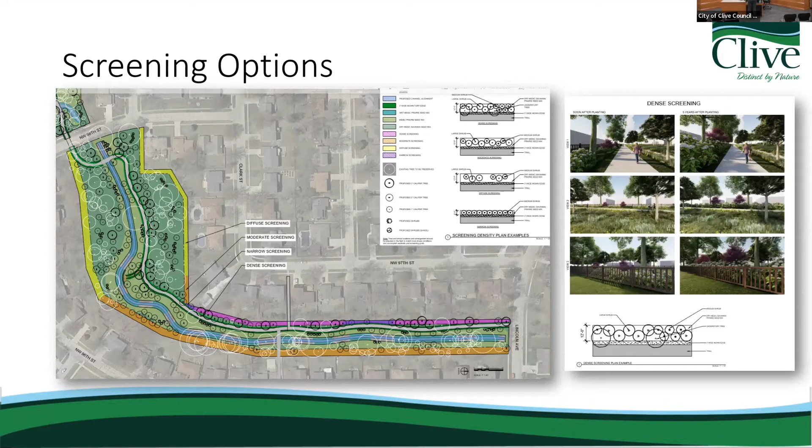So next is the trail discussion. Up to this point, the existing conditions were basically a small wood chip or dirt path that transected the whole area from 100th Street all the way down to Lincoln. It was pretty overgrown with honeysuckle and some shrubs. We'll also walk through some of the discussions we've had in the neighborhood about the trail, the Greenbelt Master Plan, and the starting and ending points of this trail and what that route looks like. Then we have a few discussion questions related to the trail at the end.

So the first part is the pre-existing conditions out here. Much of this was that dirt mulch trail. I believe every year or two my staff would go out and add some mulch to it, but it would get beat in pretty good. There's a decent amount of traffic from the neighborhood and very dense vegetation around that. There has also been for quite some time a paved sidewalk connecting Northwest 96th Street and Northwest 97th Street, with a small bridge across the creek used as a school walk route for Indian Hills Middle School. That's a 4-foot sidewalk.

This probably gives the high points. Dakota's here and he'll probably give some other points beyond this, but some of the things we heard when talking about this: there was a lot of concern initially about the loss of trees, and residents were absolutely correct. A lot of tree removal had to be done to get this project underway and get that creek stabilized. But they liked the feeling of it being natural space, much of what Susan talked about with butterflies and being attractive to pollinators. They want it returned that way when this project is completed, and they want the trail put back from Lincoln to 100th Street when it's done. Probably the most discussion we've had is about what that trail should look like.

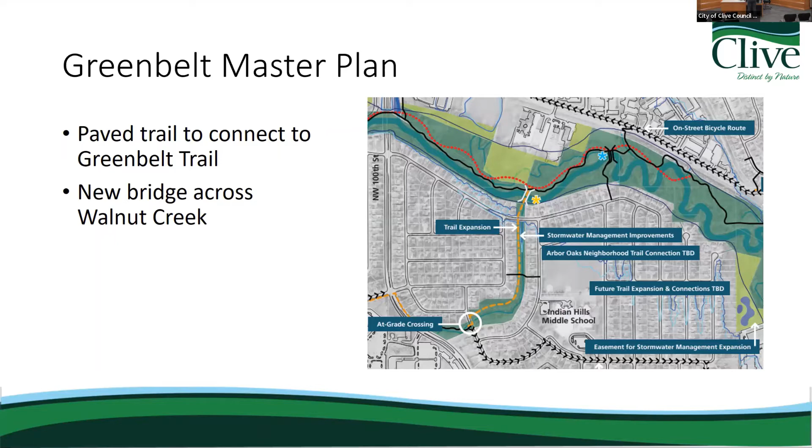Next is looking at proposed trail extents and alignments. When the creek restoration project was envisioned, it was really only talked about putting the trail in between 98th and Lincoln. But as you can see on that previous image, the trail in the master plan calls for it to go from 100th all the way up to Lincoln. So there's a couple of different extents—what do you want the project to be, option A or option B? And then once we look at that, there are options on what the actual trail alignment looks like and what the resulting trail would be.

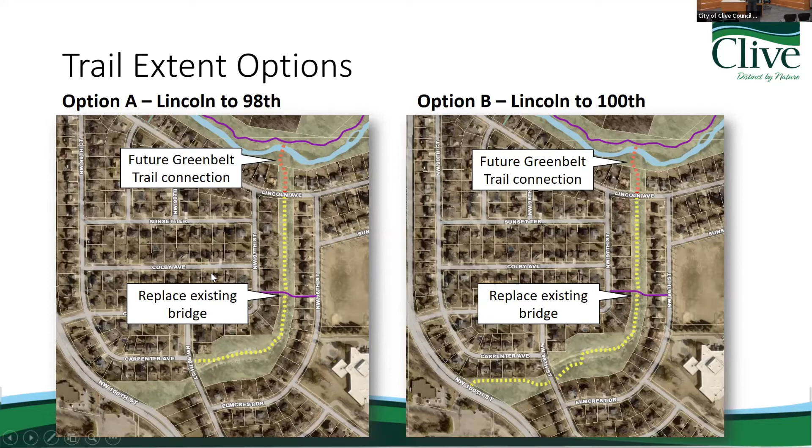So I'll complicate this a little more now—we'll talk about alignment options. We have two alignment options here. Partially, depending on what extent you choose, that kind of defines it, but also the experience of the trail we want to have factors in too. Option A is basically one bridge—we replace the existing bridge out there. Option B is what we're calling three bridges, because in order to make the experience really work out there, you'd have to cross the creek in three places. The first is the existing bridge that gets replaced. The second would be somewhere along this east-west segment of the creek.

And the third option would be replacing or adding back the bridge that was taken out when that sewer protection project was done, approximately right here. Is there an option to do two bridges, like just the one?

Some of the things we looked at here, we spent quite a bit of time in this area. The way this would work, the trail would come up to 98th Street, and at that point you'd have to jog down the sidewalk to the south a little bit, then cross the street and have that second bridge.

The reason we didn't propose that, at least here, is it doesn't create as nice a trail experience. It jumps you up to the sidewalk, you'd have to widen the sidewalk for 50 or 65 feet, then cross the trail again. So there's a lot of zigs and zags through there. Could it be done? Absolutely. It's just not as nice an experience.

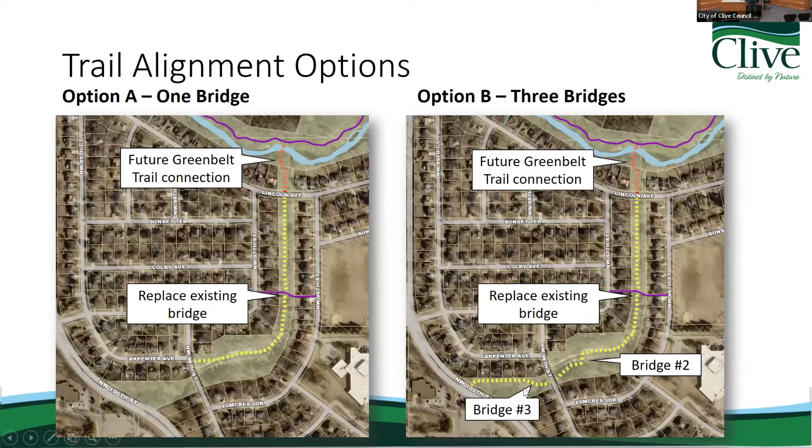Are these wooden bridges? They would be the typical prefabricated bridge that we have on most of the other trail crossings on the Greenbelt Trail. Real similar to the one at the Aquatic Center is probably the best comparable example, just a different length, that's quite a bit longer. Yeah, I think that's 110 to 120 feet, and those would be a neighborhood of 40 to 60 feet long.

And what's wrong with the Indian Hills Bridge? Is it just old, out of its lifespan? It just doesn't have enough freeboard underneath the bridge for higher flows, and so that would become a backup point. It's not very old either, it's only three or four years old. Yeah, and we've actually talked about, we're going to probably salvage it and find another location in the park system.

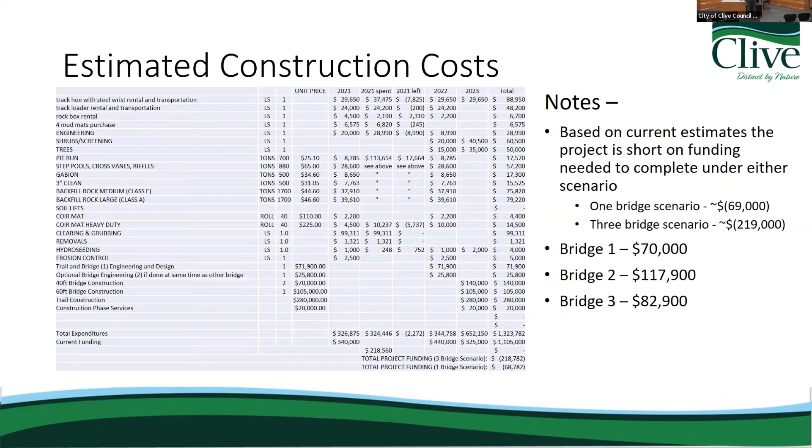But I think, like Matt said, we do have some other alternatives based on the guidance the council's given us tonight that we can dig into deeper as we progress through this, to look at some of the costs and surfaces and how we get that more natural feel but still have an accessible trail through there. I think that probably covers most of the dialogue we had there.

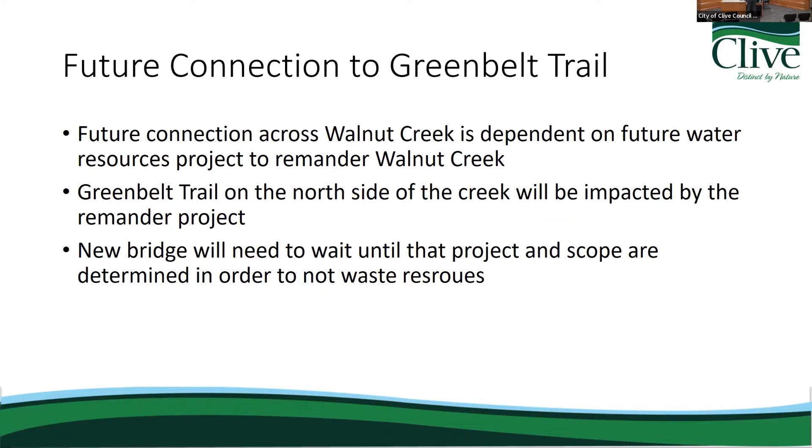Dakota's—yeah, no, that's what I wanted to, so we talked through kind of all these things that we saw here.

The reason we really wanted to have this discussion tonight with the council is because Pete, Councilmember Weaver, and I met with Dakota out there, and one of the things we committed to was bringing the council up to speed, but also providing an opportunity for all the residents who back up to this area to meet with any of you who want to come out and walk through the neighborhood. We want to make sure you're up to speed on what's happened so far, and then bring this back at some point for a design contract with an engineering team to take your guidance and turn it into an actual trail. Ultimately, based on where that goes, we'll need to see if we adjust existing funds or find additional funding.

That's tentatively set for September 7th, right? Well, that's news for our residents here. We just got that set up this week. So that's basically everything I have. I'll turn it over to Dakota or anyone else who wants to speak about this. Looking forward to continuing this dialogue with the guidance we've gotten tonight and how we take this to the next step. Thank you, Richard.

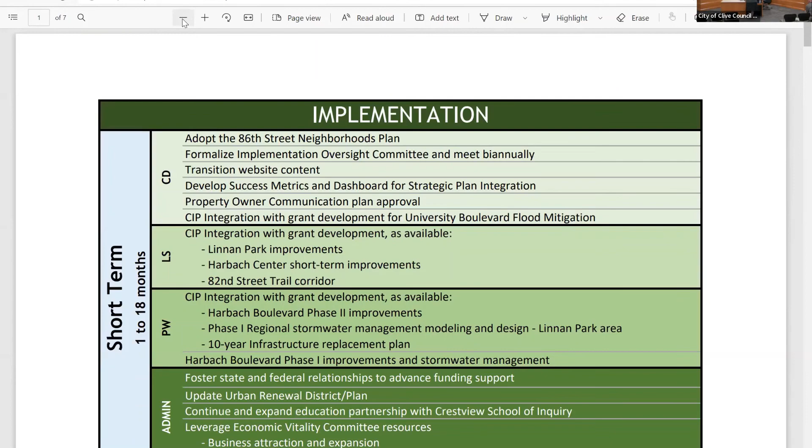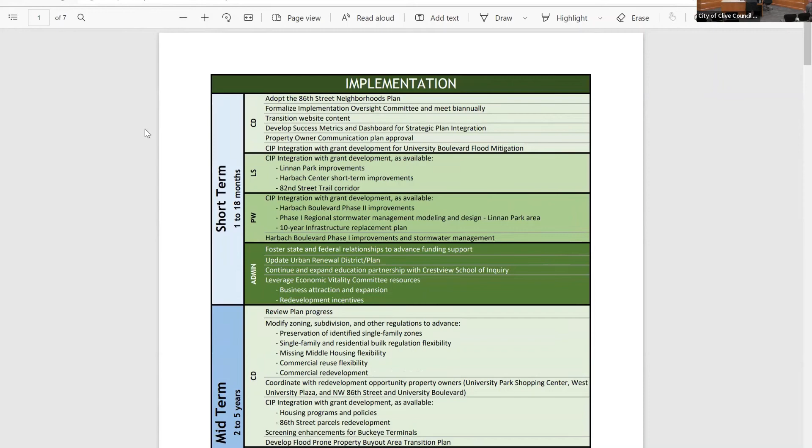What I would add is the theme of the discussion items tonight was preparation for your conversations over the next two weeks. Particularly related to 86th Street, I can't emphasize enough Amanda's comments that, as you see in the matrix, there's crossover between multiple departments and multiple resources to hopefully see the success you all want with this 86th Street neighborhood plan. I think a theme you're going to hear from me next week is understanding those capacity needs, and knowing that if we're going to be committed to this effort, there's a couple big items.

What tools is the council comfortable with staff utilizing to implement? What tools can we have at our disposal? That's going to be a very specific discussion we will have with you next week, because that's going to be very important, particularly when we're talking about circulation.

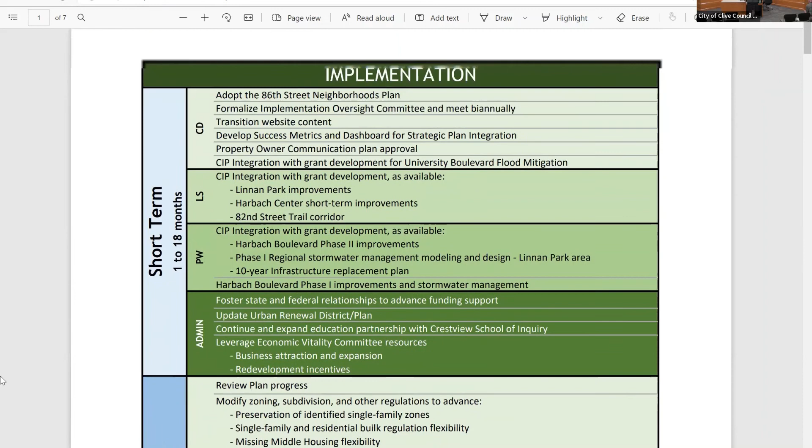And other elements of this plan. Then also that second piece of the capacity needs—if we're going to get into some of these implementation items, it could be a few years at least of needing to stay focused and dedicated to it. We understand, and that's part of why we do strategic planning, that may mean other things go to the back of the list if we want to stay focused and committed to things like Linnan, Harbach Center, the flood prone property buyout area, all the elements you see in this implementation that will take a lot of resources. But we wanted to make sure we did a good job of outlining all of that need, at least from staff's perspective in this matrix, which I think Doug and Amanda have done a good job of trying to identify.

I jumped ahead a little bit, Doug and Amanda, on some of that, but I just want to make sure the council hears that before we head into this discussion next week.

Yeah, just real quick—really nice job. This is where you really start to get in the weeds with the action items, taking the overall large overarching concepts of the 86th Street plan and dialing in on short, medium, long term and who's responsible for what, really getting into the weeds on implementation of this really big project. I appreciate the heavy lifting you folks have done on that. It's a lot of stuff, right? It's a lot of stuff. And I think we can appreciate that with this kind of plan, the bandwidth on staff is certainly much greater, and also you look at budgetary needs as well.